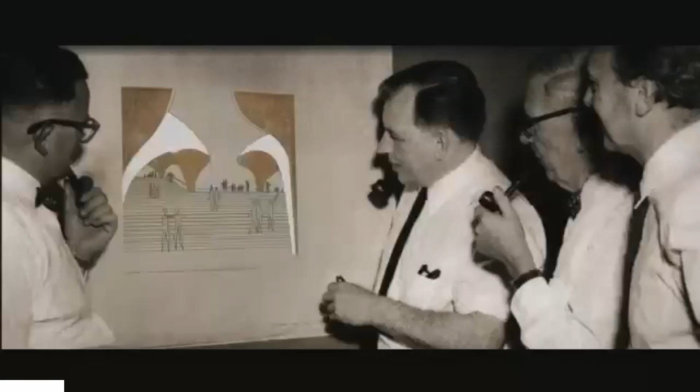And this is the site that was chosen, Bennelong Point. It was chosen for the Opera House. Now, one of the important things to note is that it is a long and fairly slim site, and this is very important in terms of understanding some of the issues around design and to a certain extent what went wrong.

And so these are the judges looking at Utzon's scheme. As you can see, it's a shell structure, as was very fashionable at the time. On the left is Henry Ashworth, and he was the representative of the Sydney Opera House Organising Committee as one of the judges. And then you have Eero Saarinen on the right. You have Cobden Parkes, who's the government architect, and then further to the right is Leslie Martin.

And Leslie Martin, of course, had only 6 years earlier designed and delivered the Royal Festival Hall very successfully. And Saarinen was a bit late on the judging. Nobody's quite sure whether this story is true, but it says he turned up and he went through the reject pile and found Utzon's drawing, and he pulled it out and he said, this is your winner, and the others agreed with him.

And I was reading Peter Carolin talking about Leslie Martin not long ago. He said that he used to recall Samuel Alexander's suggestion that the mass of architecture, with its link to practical purpose, should be the same as good prose writing, while the rest, designed for less common purposes, might be regarded as poetry.

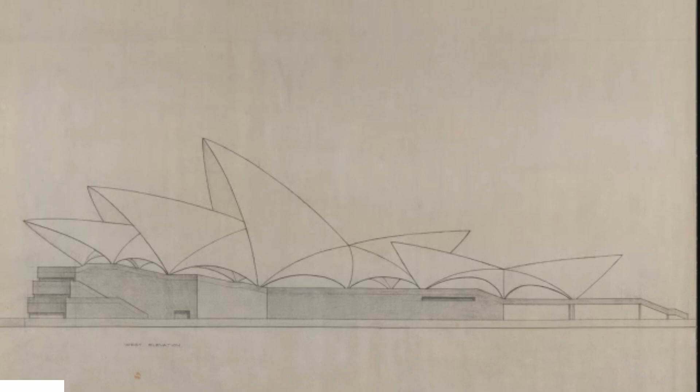But of course, it was possible to build buildings a bit like that. And other people had been doing it. And so you've got Felix Candela, engineer, designer, and constructor, and he was building these all over Mexico and Valencia and so on, quite happily and successfully, and a lot of them are still standing today.

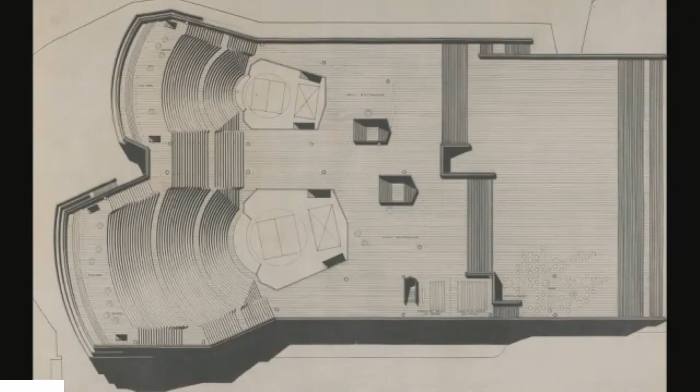So the brief was to provide in the larger hall, and this is important, concerts, large-scale opera, ballet, dance, choral, pageants, and mass meetings. And then in the small hall, it was going to be dramatic presentations, intimate opera, chamber music, recitals, and lectures. So that was the brief that was given to Utzon, and that's what he aimed to deliver.

Then Utzon had been advised, because he had not consulted an engineer in producing his competition scheme, to contact somebody who would help him, either Ove Arup, here in the picture, or Christiani & Nielsen, another Danish company well-versed in constructing shell structures. But Ove Arup got in there first.

He wrote a letter very quickly after Utzon was announced as the winner of the competition, something that in those days was actually against the code, both for architects and for engineers. So he was touting, really highly unprofessional, but he wrote it in a rather sentimental way, that we're both Danes and we could work together and solve the problem. And so Utzon was quite pleased to work with him, and they worked together for a number of years, and engineers within Arup described it as rather a father and son relationship, very close and very successful for a time.

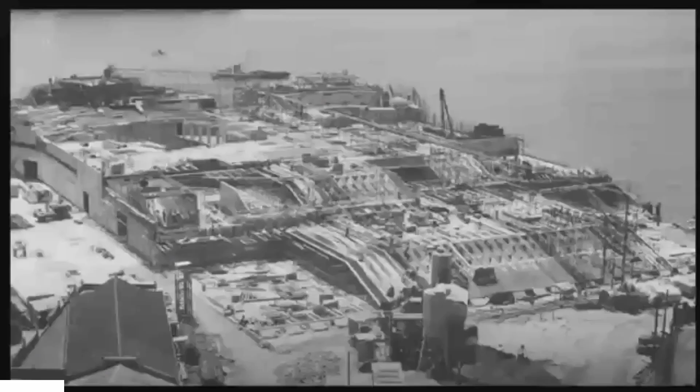Now, the actual construction of the whole complex was split into three parts. There was a base, where Utzon had been inspired by Mayan architecture, this sort of large decking which covers the site, and then on top of that went the sails, the shells, and then the third phase was the interiors.

But one of the things was that the project had been championed by Joseph Cahill, who was then the Premier of New South Wales, and he was ill, and he wanted to get on with it because he saw it as his legacy, really. The other legacy he has, which still exists, and I don't think they've taken it out yet, is the Cahill Expressway running through the centre of Sydney, which is probably the one that, because of his name attached to it, people recognise as his legacy.

But he was keen to get going with it, and even on his deathbed, he instructed the minister, a chap called Norman Ryan of Public Works, to ensure that the Sydney Opera House got built, because there had been quite a lot of debate in Sydney about its cost and whether it was needed and whether hospitals were more important. The sort of debate that happens with large projects everywhere, actually, that there are better things to spend this money on.

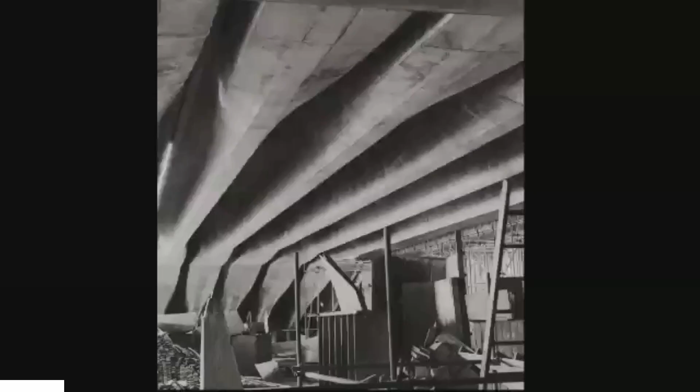So the base then started construction, and it started construction before the shells were fully designed. And so that started to spell trouble. But at this stage, Ove Arup and Utzon were working very well together, and this enthused Utzon enormously, and Ove Arup was very proud of it.

He actually designed the structure of the undercroft, which is a large area underneath that base, and to reduce the number of columns, Ove Arup designed this special beam which moves from a sort of T type shape beam to a U, and in doing so creates this rather elegant shift in the structure, which Utzon was very pleased about, and he said to Ove that this is your concourse, which later we'll see was quite an interesting thing for him to say.

But at that stage, as I say, they were working together like father and son. Arup believed that in Utzon he had found, you might say, the perfect architect with whom to collaborate. His personal quest for total architecture, which is an approach still today promulgated within the Arup organization, is an approach that dissolved the disconnect between engineers and architects, something that he really sought the whole of his career, not always successfully.

Arup Associates was set up to deliver that, but that's now been merged back into the main engineering company. But the idea of total architecture, where all the various strands of construction are brought together, is very important from Arup's point of view.

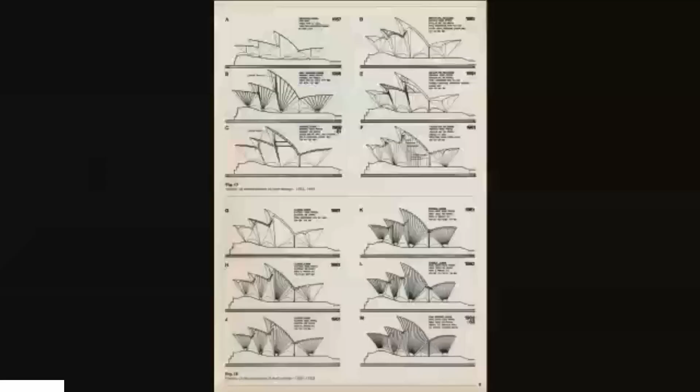So stage one, the base is being built, and they start thinking what to do about the roof. And so these are the various schemes that they went through with Utzon to try and design the roof. And you have to realize, and Jack Zunz would reinforce this a number of times in our discussions, that in those days, the architect was the leader of the building team. So what the architect said, as far as the engineers were concerned, went.

And so they spent 3 years, Jenkins mainly spent 3 years trying to work out how you could make the competition scheme stand up and retain the profile that Utzon had designed. So up at the top, they're using shell structures, single skin shell structures. They drew parabolas. They experimented with ellipsoid geometry, single reinforced skins to start with. Then they saw the bending moments were too great, so they started having 2 shells up to 1.2 meters apart, big structures. And so as you work down through this list of ways of doing it, they tried using steel.

Jack Zunz was really a steel person. He had been working in South Africa before he came to London to work on the Sydney Opera House. He'd done a lot of buildings in steel, and he knew how that worked. But when he suggested to Utzon that they could have a shell with a steel structure inside, Utzon didn't feel that that was quite an honest use of materials, and so that was turned down.

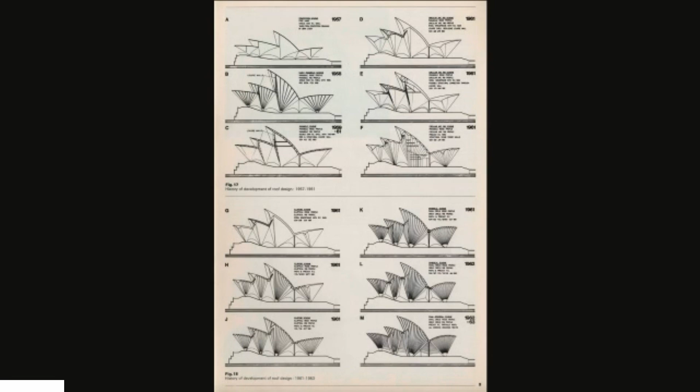And at a meeting in Arup's offices in 1961, which is a very, very key meeting, in spite of the fact that selecting the rib version meant throwing away 3 years' work, Utzon said to Zunz, "I don't care what it costs, what scandal it causes, but that's what I want." Very different to his competition entry, but nevertheless something that would actually stand up.

So then they had to think about how they actually built that, because in the geometry that Utzon had, every section would be different. So actually casting the concrete would have been very hard. And this is where the aggravation, you might say, between the engineers and the architects began.

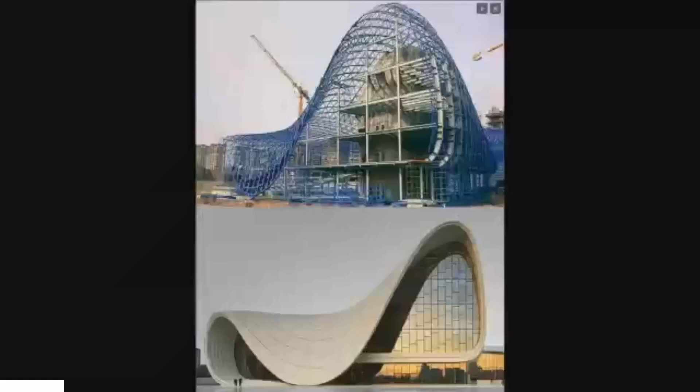And so, quite interesting, quite by chance, only the other day I came across these pictures of the Heydar Aliyev Centre in Baku, designed by Zaha Hadid, with Hanif Kara at AKT II as the engineer, which is actually a steel structure with a shell fixed to the outside, which was thought to be too dishonest by Utzon, and which is why he didn't like it. So they ended up with the structure that you see there today, which is based on this circular geometry.

Now, the way that Zunz describes it is that for 6 months, they had meetings with Utzon talking about how you would prefabricate elements so that you had similar angles to the prefabricated elements, so that you didn't have to make every single element a different form and shape. So they discussed the idea of spherical or toroidal geometry that would actually give them a radius that was similar as you created each of the big beams that then made up the structure.

So then one day Utzon rang up Jack Zunz and said, "I've solved it." And he came up with this idea using, as you see, these circular sections which were cut out of a larger sphere. So the aim would be that these would be cut out of a sphere of 246 feet radius. The ribs all followed the great circles of the sphere, and so they could be cast as repetitive elements, i.e. the circle was always of the same radius.

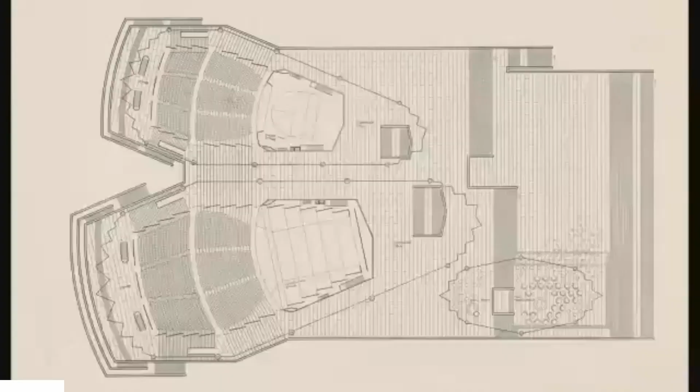And that was something that Utzon had to try and work on, of getting people further back behind the orchestra, because he couldn't fit enough seats in that area that you're seeing at the moment, which looks like the appropriate number, but actually wasn't. And of course, one of the issues around having a multi-purpose hall is that you have very different acoustic arrangements for concert and opera.

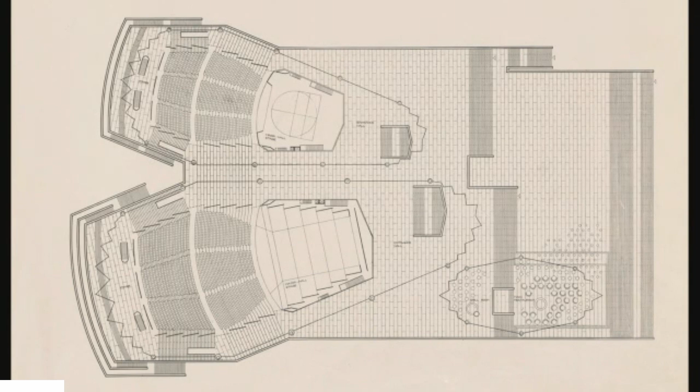So for concerts, Jordan was looking at 1.8 to 2 second reverberation, which gives a richer sound. And for grand opera, where you need more clarity, 1.6 to 1.8 seconds. So you have to be able to vary the inside of the hall enough to generate those differences in reverberation time. And the way that Jordan did it, of course now you just do that on a computer in a couple of seconds, they used 1 to 10 scale models, and they then speeded up the tape recordings of that in proportion to the scale to see what the effect of reverberation was within the forms.

So as the whole project heated up, Arup moved some people, not a whole office, but some people to Sydney, and Utzon moved his whole office to Sydney. I mean, Arup had never really intended to open a Sydney office, although they did later. They were using MacDonald, Wagner and Priddle, who were the sort of big engineers in Australia at the time, as their representatives. And also the London partners of Arup were getting rather fed up with the job. Although it was highly prestigious, it was using up masses of time.

They were losing money hand over fist, and it was beginning to really cost them, partly because they were producing a whole lot of drawings which they thought Utzon should have been producing, but never did, including all the drawings, as you can see, for the very complex shells, contract drawings they were delivering, as well as the tile drawings which go on the outside of many millions of tiles, all in those days drawn by hand.

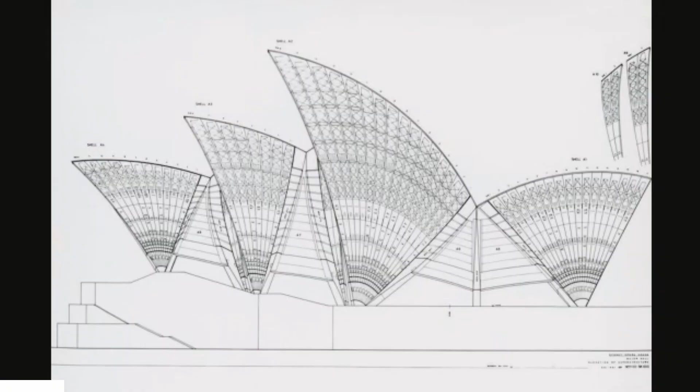And Arup had sent a chap called Michael Lewis, old friend of Zunz's, who was a sort of no-nonsense engineer. And he was traveling by land to Australia, had a nasty accident in Jerusalem, and he arrived a bit late. So the opening of the offices was somewhat chaotic, so at that stage, the job of Arup was really to monitor the construction of the shells, and Utzon was there to start designing the interiors.

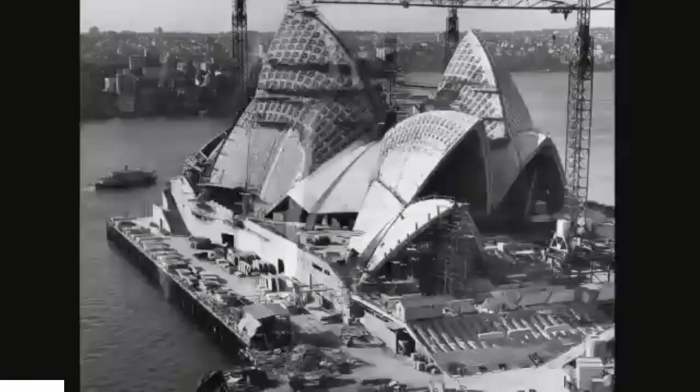And so they started on site, and the first side shell to erect took them a full 4 weeks to determine the precise position it should be in. And so they realized that if it was going to take them that long to put each panel in place, they wouldn't complete the project in their lifetime, let alone in 2 years.

So they developed a computer program which determined the positions of all the various elements on site, and then they would survey that at the end of each day. The computer would run the results overnight, and they would then know exactly where to place the new elements in space, and the space was quite high up. Adjustments could be made accordingly. So it took them a bit of time to develop the program, but that actually didn't hold up construction, because there was a crane driver strike for 3 months at a very apposite moment.

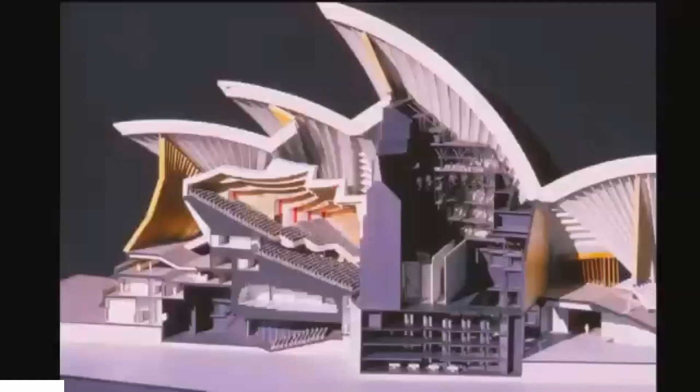Now, you can see inside the main theatre, under the shells, there is this big, slightly zigzag ceiling, which Utzon wanted to build out of large sections of plywood. There was a very advanced plywood manufacturer called Symonds, who could also laminate plywood to various metals. It wouldn't be totally gold, but it would be painted gold or with gold leaf, to give this curvilinear shape, which focused down on the stage.

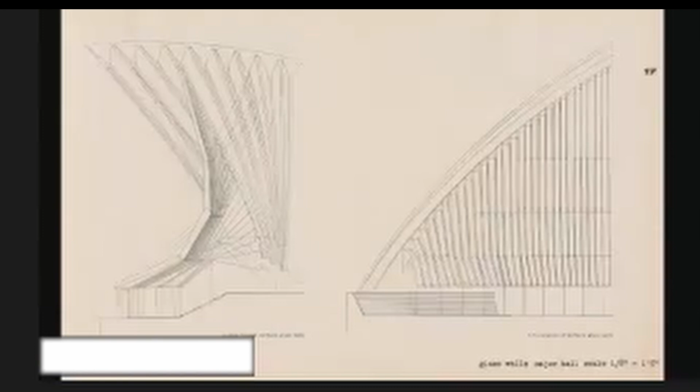And they were very large. The engineers were worried that they might actually pull the shells down. The contractors didn't think they could even get them onto site, but Utzon was insisting, and he wanted to build a prototype and was asking for money for it. He also wanted to do the same thing for the window which overlooks Sydney Harbour, and this is the window he designed. We'll see pictures later, as it turned out slightly differently.

So Utzon at the time wanted money to build a prototype, but he was also running out of money, because he was insisting that he couldn't do any drawings if he didn't build the prototypes, and the Ministry of Works wouldn't pay him until he'd done the drawings. So he was in a catch-22 situation, and he'd hoped the minister would pay some $60,000 for one of the prototypes, and that just wasn't possible.

So, as I say, without the prototypes, he wouldn't proceed with the drawings. Without the drawings, Hughes, the minister, was able to stop payments. So Utzon went to see Davis Hughes to have this out with him on February the 28th, 1966. And so they started discussing fees. Hughes said he'd look into it.

So Utzon said, well, if you don't do something about it quickly, I'm going to resign. Hughes said, that's no way to speak to a minister of the Crown. And so Utzon walked out, and then later that afternoon sent a letter saying to the minister, you have forced me to leave the job.

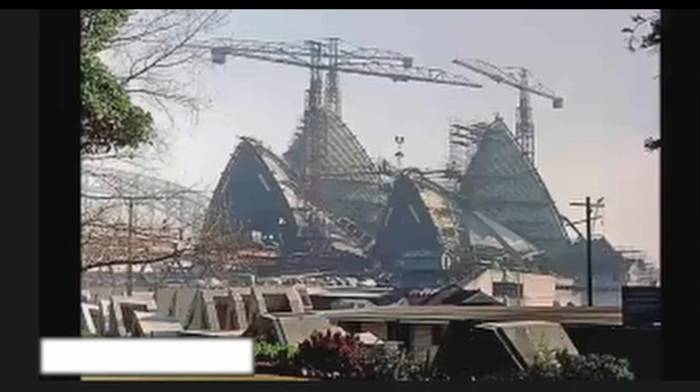So this is what it looked like when Utzon resigned, and the photographs were taken by Peter Hall, who was commissioned by the government then to take on the job of delivering the interiors. And Peter Hall was 34. He was seen as one of the leading young designers in the country, and he thought that he was being hired to oversee the execution of Utzon's scheme, which Utzon had claimed at the time was fully designed. And he was given a bit of backup.

This is Hall on the left, and the firm of Hall, Todd and Littlemore was set up. That's Todd on the right, Littlemore in the middle. And they were the official architects for stage 3 of the Opera House, which, as I said, was the delivery of the interiors. Hall did things very professionally. He wrote to Utzon saying, "The minister has assured me that your services have been properly terminated."

And then he went to look at the drawings, and when they went to collect the drawings, the cupboard was almost bare. Utzon's architects had kept 5,000 of the more recent drawings, and these didn't actually emerge until 1973, after the building had been completed and opened. And maybe they had taken them as a sort of bargaining chip if Utzon came back. But then, they had not been delivering any drawings that were actually used on site.

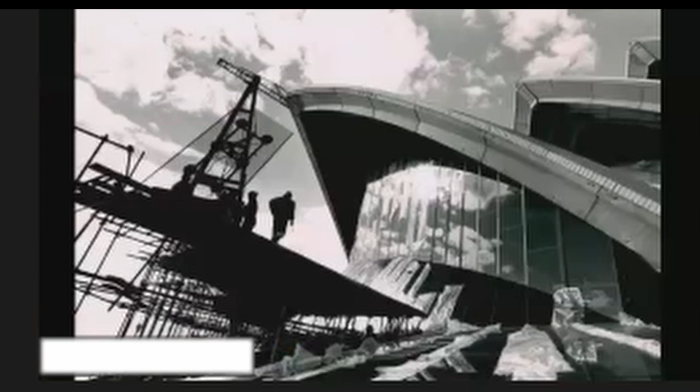They got rid of Utzon's idea of building plywood glass walls, and they designed a steel version. They were very complex, those end walls, because the geometry changes from semicircle, it's one radius to another one of another radius, then it has to come in and fit into the base underneath. So very, very complex operation and very cutting edge at the time. Nothing had been built anywhere in the world, actually. So everything from adhesives to mastic and the way that glass was held up was pretty cutting edge.

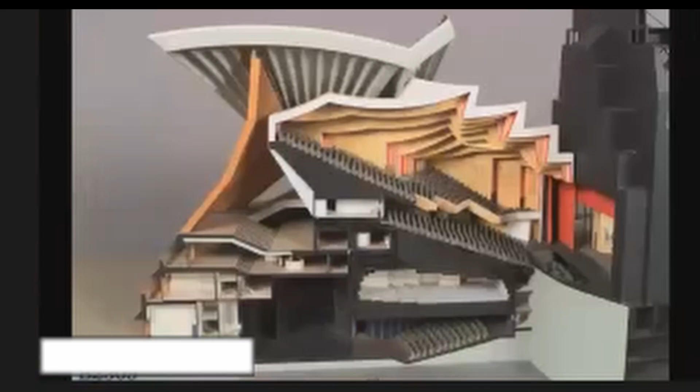So the Queen then opened the building on October the 20th, 1973, 16 years after Utzon won the competition. And then everything went a bit quiet. As I said, one of the big surprises was that they started having pop concerts, which they hadn't expected, and that needed totally different acoustic requirements. And then in 1994, there was an exhibition called Unseen Utzon, and this was put together by supporters of Utzon who had not stopped supporting him.

They thought that Hall's interior should be ripped out and Utzon's be put in there, and they had an exhibition where they said he had solved all the problems, but Australian architect Ken Woolley, who's written a very studious book on what Utzon produced, said that there was no drawing in that exhibition which could be called a working drawing, which would deliver anything.

But that raised the interest in trying to get Utzon back to see how the next stage of repairs and alterations to the building should be undertaken. And soon after the Unseen Utzon exhibition, 1995, Hall died. He was by that time destitute. He was alcoholic. He had literally been destroyed, I would say, probably by the architectural profession in Australia, who had in the main supported Utzon and had castigated Hall for his involvement.